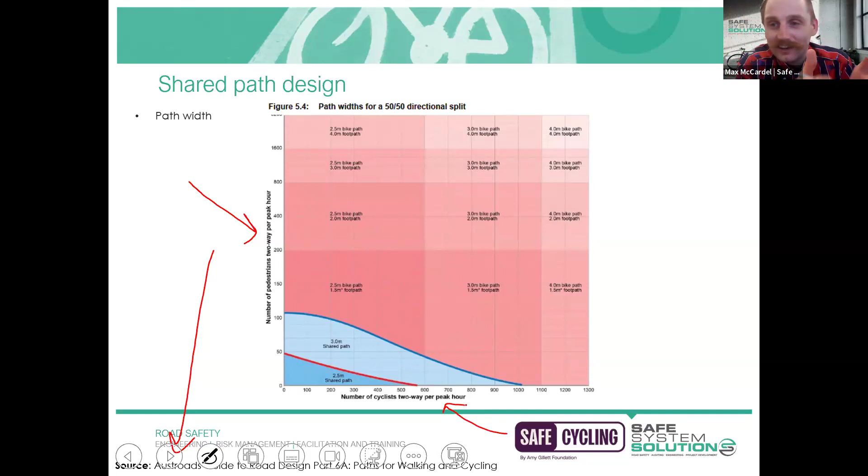This figure from the Austroads Guide: along the y-axis we've got the number of pedestrians two-way per peak hour, and along the x-axis, number of cyclists two-way per peak hour. Basically it's saying how many riders and how many pedestrians you're expecting during the peak time.

I'll focus on the extremities of this graph. If we look in the top right-hand corner, we've got lots of riders and lots of pedestrians. What's being recommended is a 4-meter wide bike path and a 4-meter wide footpath. So I wanted to reiterate that we shouldn't just go straight to building a shared path for off-road facilities, because that may not be the most appropriate thing. Instead, reflect on what volumes are anticipated, and that can help you decide what type of facility could be appropriate.

The 3-meter shared path, which is pretty common, is only really recommended within this field here, but as volumes get higher and higher, particularly pedestrian volumes, that's not being recommended.

A few other points to consider: these, like all figures and guidelines, should be taken as aspirational. That's what we're aiming for. It's absolutely better to have a 3-meter wide shared path than do nothing at all. So don't see this as mandatory, otherwise you can't provide for anything at all. But this is what we should be aspiring towards, because we know that will provide a better level of service for both people walking and people riding.

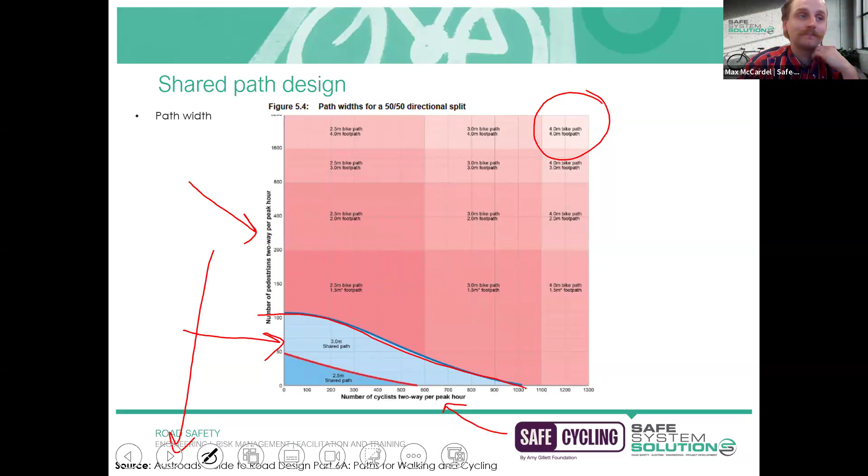The local access path you can think of like a local street. If you reflect on your road use hierarchy, this isn't expected to have an arterial function for shared paths. It's basically connecting to an isolated residential community that probably doesn't have further connections beyond that, and that's when you could look at having narrower paths.

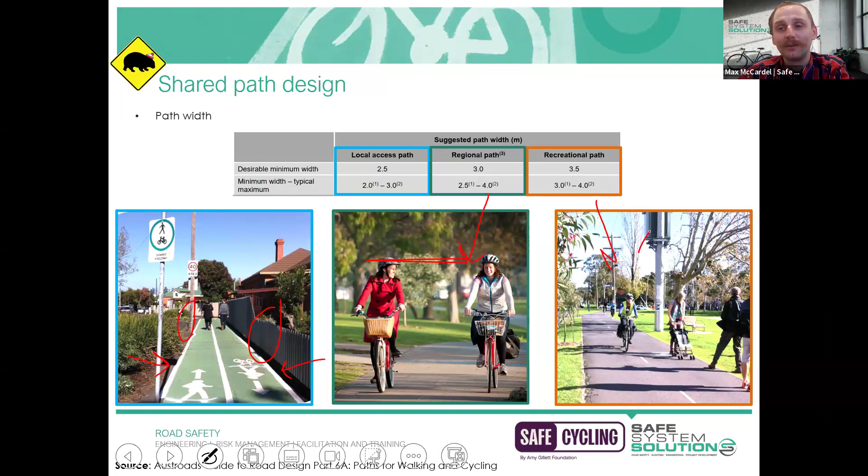Recreational path, I'll be completely honest, the way that the regional and the recreational path is separated within the Austroads Guide is very hazy, very nebulous, the difference between the two. The recreational path may have adjacent facilities where people, parents with prams, may also be joining. So it's not just walkers and cyclists. You may have a playground there, or there could be a school adjacent, and you might have wider facilities because of that, but it's not really well spelled out at all, the clear distinction between those two categories. It's generally just considered a local path or something with a more arterial function.

Marissa: Yeah Max, we've just got a question on that. How do we convince MRPV to budge on these things? They seem to have a blanket statement of 3 meters SUP and that's it, no more and no less, even based on this figure.

Yeah, it's a good point. I mean, MRPV do wonderful work in trying to provide these upgrades to our transport network, and they often have to work within very constrained environments and are often completely aware of the implications of adopting larger footprints or widening out shared paths and what that could mean. So I fully respect those kind of constraints that they work from.

How could we better advocate for those wider facilities? I think what our job is, as people really involved in cycling infrastructure or interested in advocacy, is to use our influence and our knowledge of these guides to say we know that it is a safety issue when there are narrow paths. We know that it does cause riders to weave in and out of pedestrians, which provides a poor level of service for riders and pedestrians. And we can also back that up with what Austroads is actually telling us to do, which is, in this scenario, we should be building a 4-meter wide facility or whatever it is.

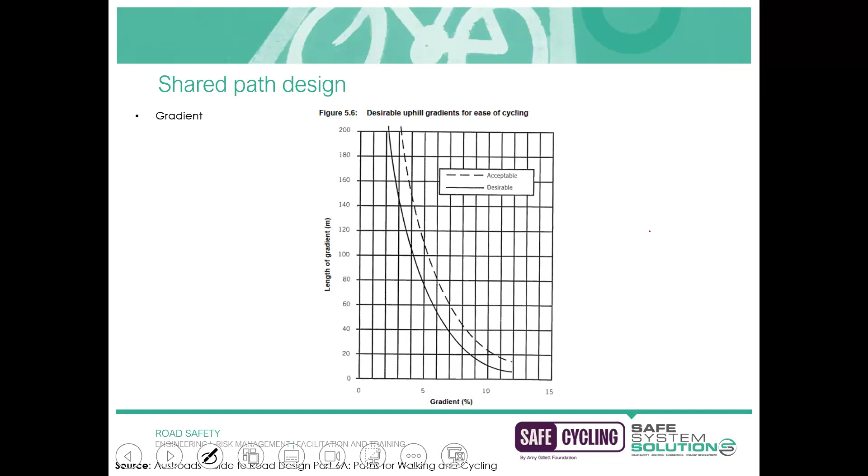No worries. So we've got now another diagram for us to look at, which is considering the gradient or the steepness of a shared path and what would be considered desirable or acceptable. This diagram is easily 20 years old, adopted from a US journal, and there's probably some interest in perhaps revisiting this, particularly as we've seen the fleets of our cycling, our bicycle fleet, change over those years. We are seeing more e-bikes that have no issues at all getting up really, really steep hills.

Just wanted to acknowledge that this has been based on your traditional average bicycle. What we're looking at is along the y-axis, we've got the length of the gradient, and along the x-axis, we've got the gradient as a percentage.

I'll just pick a number as an example. If you've got a 10% gradient, that is very, very steep. You would absolutely know if you are riding or walking up 10%. You would feel that in your calves.

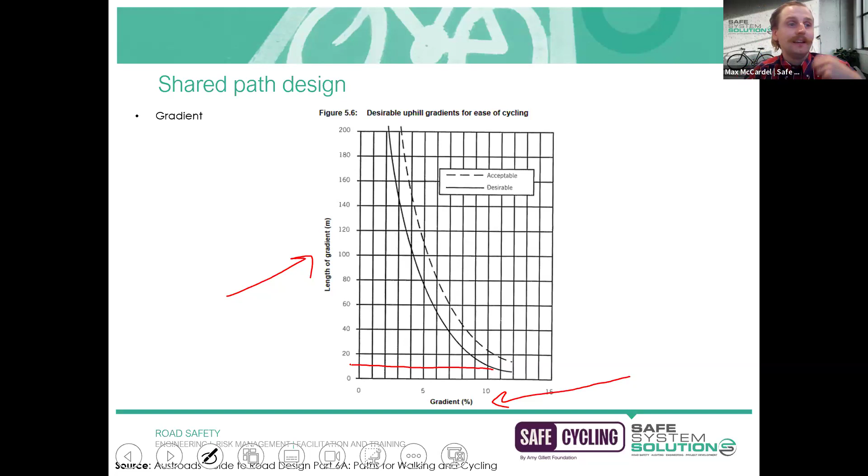Whilst that figure does refer to riding uphill, it's really important that we also consider the opposing direction as well. Riders are going to be presumably traveling downhill at that same location. So what are the types of risks that could be associated with that?

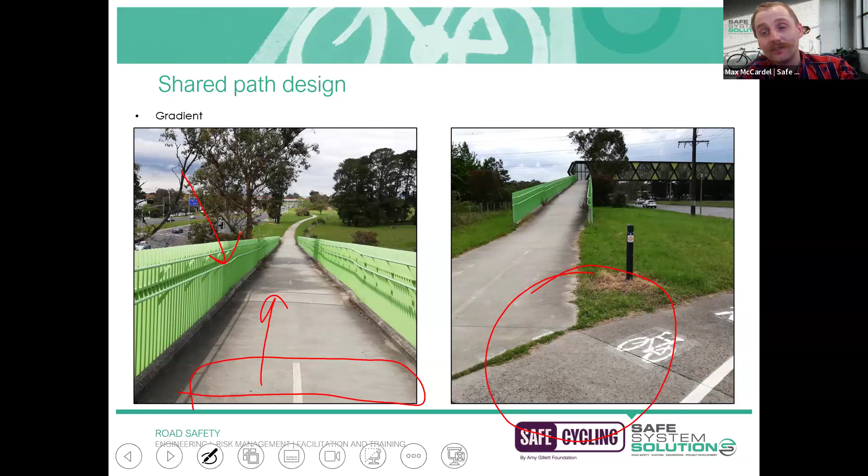Another thing that really exacerbates this as a risk is the beautiful kind of fencing or the parapet that's been installed on the ramp. It provides just like a wall where it's very, very difficult for you to be able to see any other shared path users that could be trying to join onto your path. So not a great design outcome here.

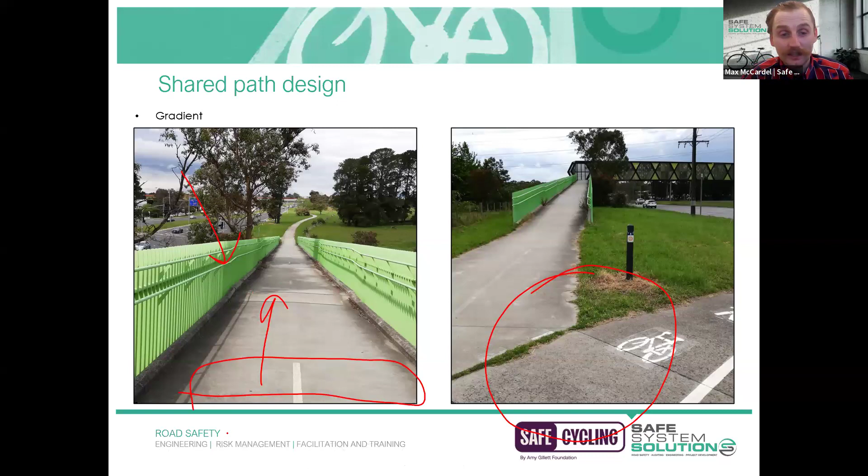This is actually one that we conducted a road safety audit on. So you can conduct road safety audits exclusively for shared paths. We brought this up as a finding - we were concerned about the speed of cyclists and also the significant sightline restrictions where there is that conflict point.

So we recommended let's just try and move the shared path connection further down, make it clear who's got the priority there as well. Just so, if you bring it further down, sight lines are better, and also riders have washed off some of that speed from traveling down that hill section. Very happy to say that that has been installed since this photo was taken, and yeah, we've seen that safety outcome achieved. Good to see lots of people picked up on that.

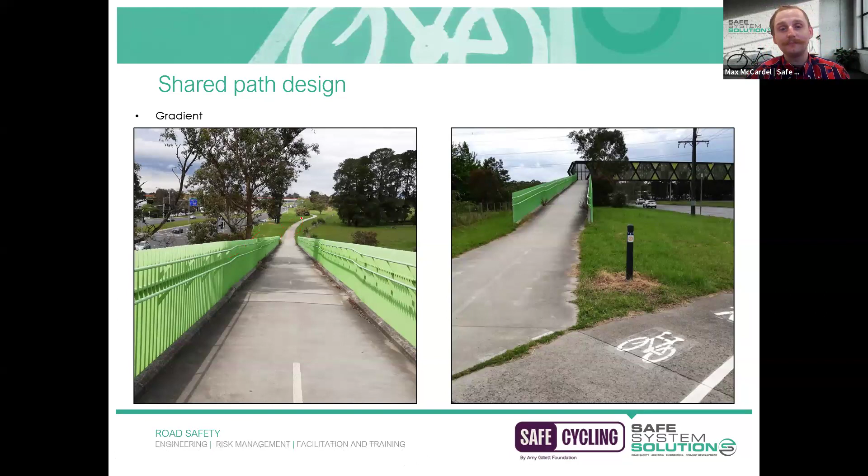First is the operating width of the bicycle and rider. Take it at a constant 1 meter, so it's easy to remember - just a 1 meter wide operating width. That's when riders are on flat terrain.

However, when riders are traveling uphill, they tend to wobble to pick up momentum to climb, and that increases the operating width. So you'd adopt something more like 1.5 meters wide in those scenarios, which could have a run-on effect on how you design the facility.

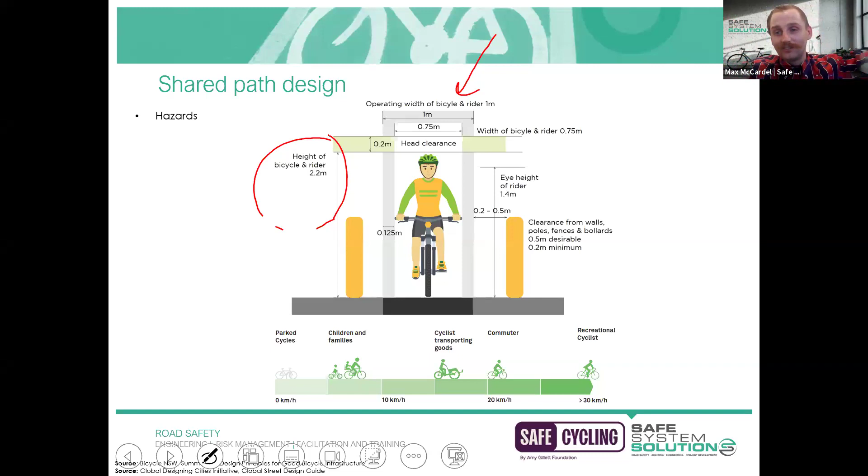The other thing to note is the height of the bicycle and rider is around 2.2 meters, and the head clearance is taken at 200 mil, though it's slightly different depending on where you are. That head clearance becomes important for riders traveling through an underpass or tunnel. It also matters for things like vegetation growing above a shared path - this envelope helps identify when things could get too close to riders and need to be mitigated.

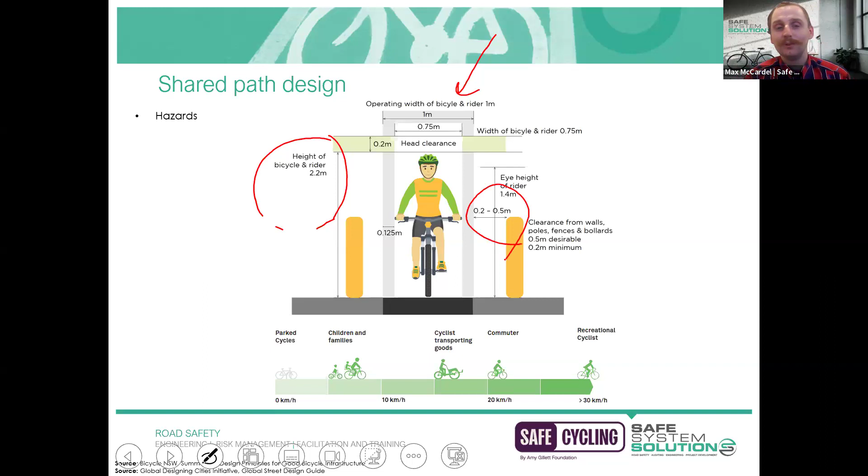The other important dimension to be aware of is the distance from the edge of the operating width to any fixed rigid hazard - a utility pole, fire hydrant, tree, whatever it is. Generally we take half a meter. It's marked as desirable, but I'd say that's industry standard - half a meter from the edge of the operating width to a hazard. Outside that space, it's deemed too far away and not something we need to recognize at this stage, depending on what it is.

The 0.2 meter minimum is really only applicable if it's a flexible object or something designed to be struck by a rider safely. So just remember the half meter desirable - that's the best way to remember it.

I've also included another diagram to give perspective on the speeds riders travel. Generally on shared paths, you could be looking at riders going from 5 kilometers an hour to 25 kilometers per hour. Faster than that, riders tend to use on-road facilities since they don't want to weave in and out of pedestrian traffic. But that range is what you're looking at for riders.

Max, just a couple comments - there's a big difference between the eye height of a rider, 1.4 meters, and the height of a bicycle and rider, 2.2 meters. Can you clarify this difference, please? It's a good question. Eye height is 1.4, height was 2.2. I can't say I've really questioned that too much, but that's about an 800 mil difference, which does seem like a lot. It's probably thinking about a rider in the worst case scenario, standing on their pedals as opposed to sitting down. But even then, 800 mil does sound like quite a significant jump.

I'll open that up to the chat. Yeah, we've got a few comments saying perhaps standing on pedals. Maybe it's just the worst case scenario, like someone actually standing up on their pedals, and that's the clearance adopted there, whereas the eye height is for a rider sitting down. But I still think 800 seems like a lot - I wouldn't have thought standing up would account for that. Good question, I like to be challenged. Yeah, some good and funny comments in there too.

There was another question: in the previous example, why do you think this was not picked up earlier by an RSA during design?

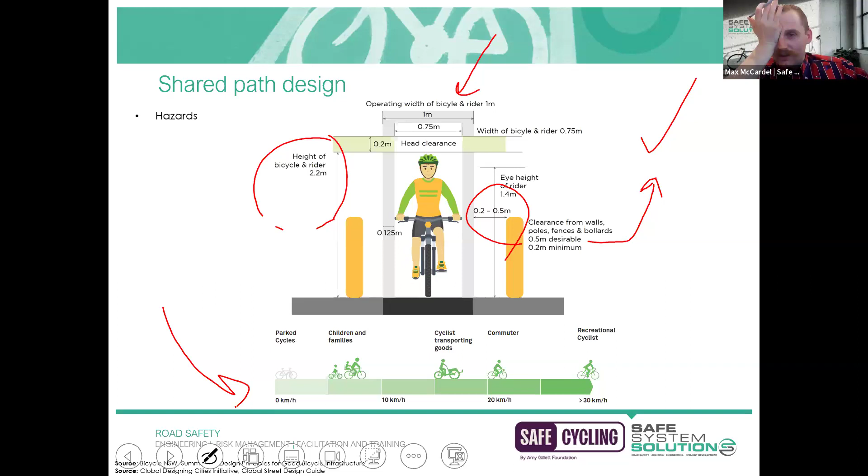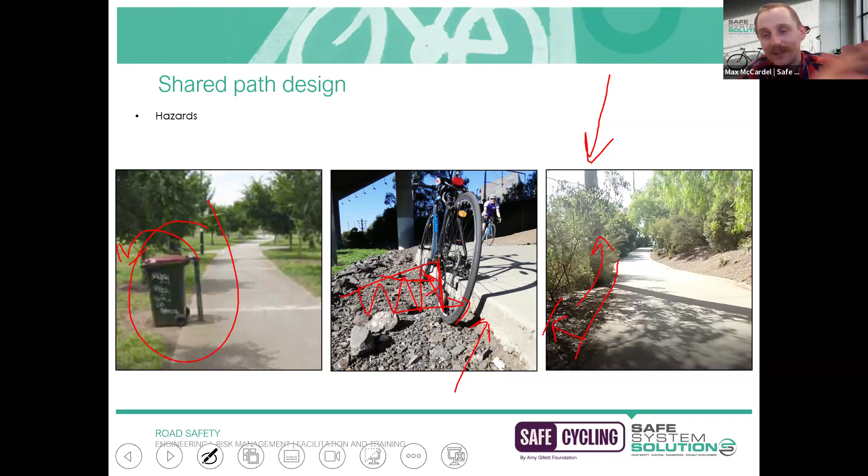If it's within that space, we would consider it a hazard. In practice, you take a 0.5 meter offset from the edge of the shared path - in other words, you accept that the edge of the operating space for the bike rider coincides with the edge of the shared path, which is a pretty reasonable assumption. What that means is if you're a designer and you've got things in aerial view - let me draw this out to help clarify. If you were designing a shared path and it looks like that, you would take this line and apply a 0.5 meter offset, so it looks something like that - basically like a shoulder. You'd be able to quickly identify if there's any trees, signs, or any fixed rigid structures within that space that could be classified as a hazard. Your job as a designer is to try and either shift the shared path away from those things or relocate the hazards. That's kind of how it works in practice.

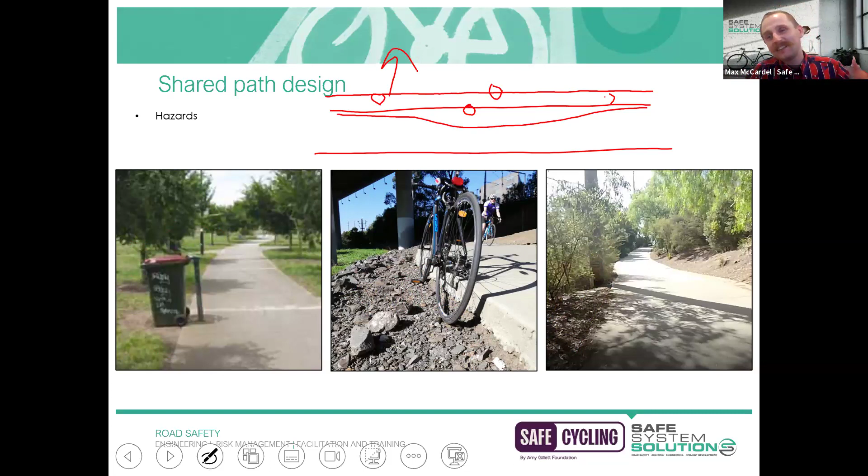Of course, if you don't have that luxury and you're working in the retrofit space and you're just trying to delineate the hazard, this is not removing the hazard, so the risk still exists.

But what we have seen being utilized is flexible paddles on shared paths, as well as line marking showing that the path is narrowing. This is by no means best practice. You don't want to be doing this. This to me is an afterthought. You want to be picking up this during the design, and basically maintain that width of the bicycle, of the shared path facility all the way through.

So if this had been picked up during the design, that shared path could have been kept consistent, and this signpost could have been moved into that embankment and built like a retaining wall structure. It doesn't need to be that big, that's a bit dramatic, but just ensure that you're able to support all of that surrounding embankment.

So that's just a few words on common hazards that we find adjacent to shared paths. Of course, there's numerous others. There's plenty that we could have talked through there.

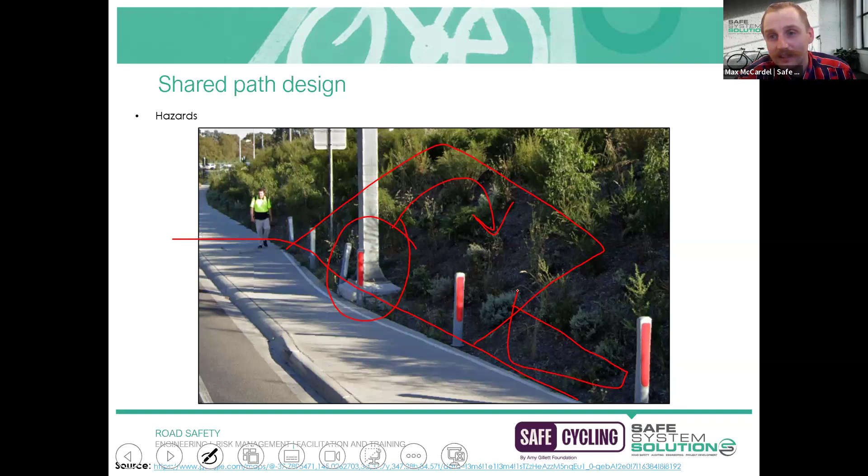Good question, pretty valid. Absolutely, it could be, but I'd like to think that our geotech and structural friends would be able to design something where you could maintain a 0.5 meter offset and perhaps build a retaining wall that isn't right up against the adjacent shared path.

I was going to read out Josh's question that just came in with regards to offsets to paths in constrained locations. Would it be more desirable to reduce the width of the path to maintain a 0.5 meter clearance, or alternatively would it be a preferred treatment to reduce these offset widths to maintain desirable path widths? It's a mouthful. I'll let you answer this one, Marissa.

Well, let me just find out. It's a good question, and I'm afraid it doesn't have a uniform response. The first question I'd be asking is, if you're unable to meet the 0.5 meter offset to any hazards, well what are those hazards? If it's isolated instances of trees, then probably I wouldn't worry about touching the cross section for the shared path. I'd just maintain it and recognize that there's isolated areas of higher risk.

You could also look to protect those isolated areas with cycle-friendly fencing, which we also talk about today. But conversely, if the hazard was consistently 100 mil off the edge of the shared path and presents a significant risk, say a fence with cyclone barbed wire mesh fencing on top, then I would be trying to narrow the shared path, because it's really important that we get riders away from that. So that's just a general assessment, but it kind of depends on what you're looking at.

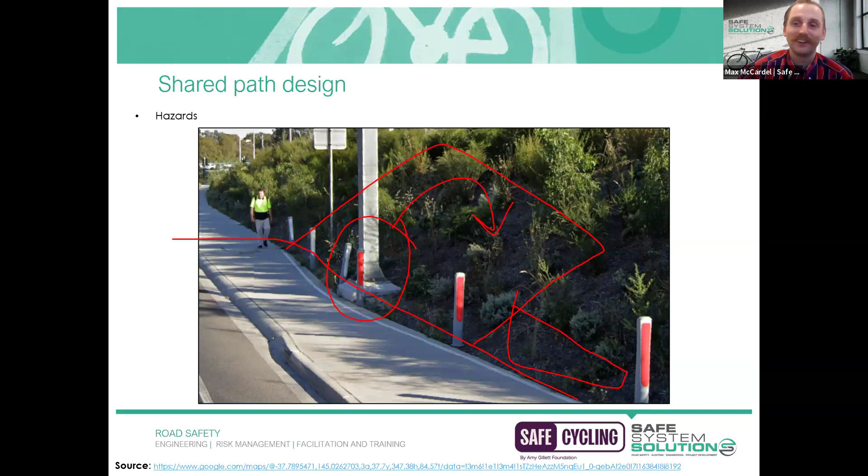I think we're all good in the Q&A at the moment. Thanks, Max, no worries. We just had one pop into the chat: would it be a reasonable approach to proceed using a risk assessment based approach then?

Absolutely, strongly agree with that. Have a bit of a chat around what would be a higher risk: to adopt a narrower cross section, or to maintain the cross section and potentially get closer to the hazards. Have a bit of a workshop around what those situations and scenarios look like, and then develop that risk profile. I think that's a really good suggestion.

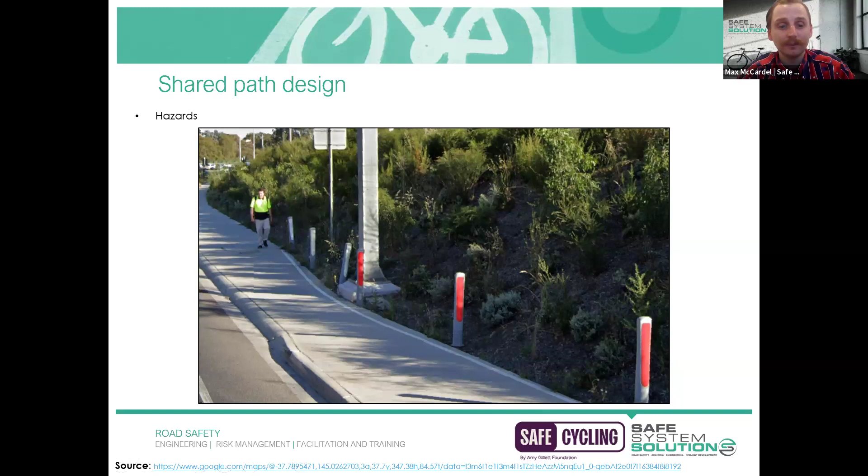Great, thank you, pleasure. So we'll keep chatting through, and next part, just wanted to make a note that we do have sightline requirements for bike riders.

So for those that have worked within traffic engineering, transport planning, any kind of technical design roles, you'd certainly be aware of stopping sight distance calculations, both for horizontal curves and for vertical curves.

So horizontal just means, can you see enough around the bend? If there's a hazard there, you can stop in time. And the vertical is, is there a crest on the hill that you're able to see over? If there's a hazard there, can you stop in time?

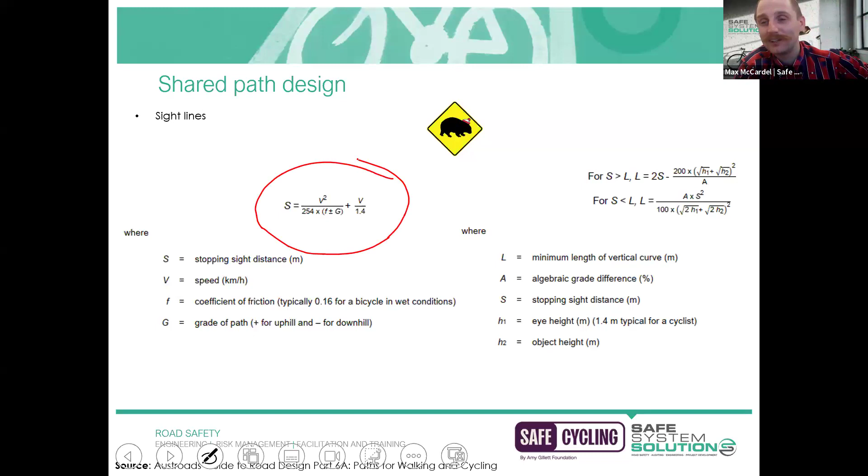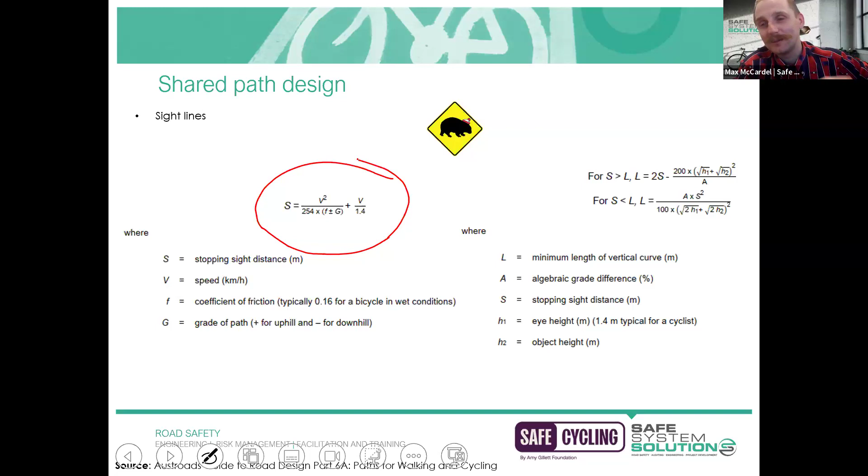Just wanted to make a note that we have calculations just for bike riders, perfectly suited for shared path uses. So if you are in that space, make a note of that calculation. It's very similar to what we do with stopping sight distances for general vehicles, just tailoring this for the speeds and friction resistance of bicycle tires as opposed to vehicle tires. You don't have to do that as part of your quiz or anything. Appreciate not everyone has that skill set, and that's okay.

This is what I was talking about, the sight distances and why you'd be doing these kind of checks. If there is an object situated on the shared path, you want to make sure that bike rider has got enough space to be able to slow down before they strike that object. It could be a hazard like a fallen down tree, or pavement that has failed.

I'm going to let my dog out of the room because he's having a bit of a stretch. Hey.

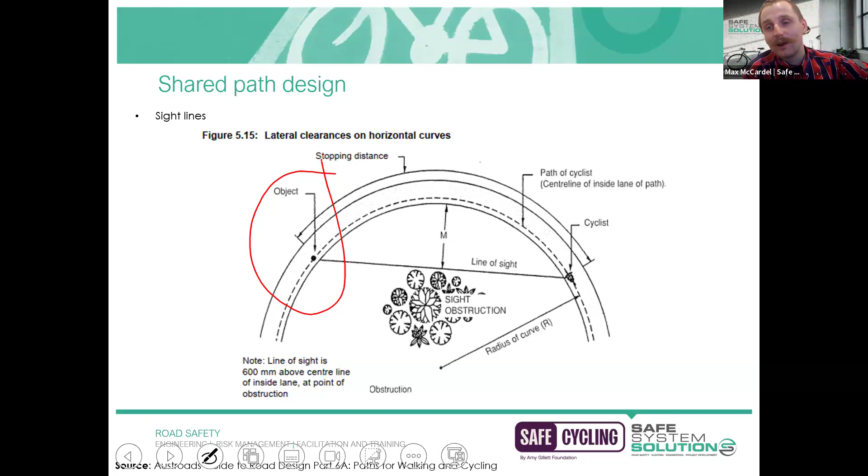Sorry about that. So that's the reason you'd like to make sure that you've done those kind of checks periodically throughout the alignment, just so it's clear whether or not we're able to maintain those distances.

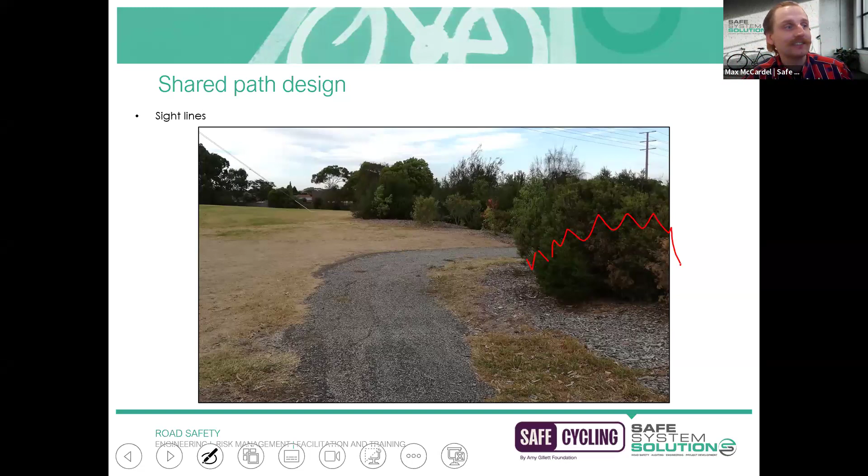All right, we'll move on to fencing now. I alluded to this a little bit before, but basically there might be areas where we are unable to relocate the shared path to move away from the hazards. We may be unable to relocate the hazard itself. So perhaps we're looking at actually installing fencing, similar to a barrier system for vehicles. We've got fencing for cyclists, so that they are shielded from that path hazard.

The two main reasons that we'd put in fencing are because we've either got a significant vertical drop, think of a cliff, or we've got a really steep embankment. Those are the two primary reasons that we put it in, but certainly not uncommon to see fences being put in because there's a building that's really close, and there's concern with riders hitting the side of that building. I've seen that being installed. There's a myriad of different reasons, but I'll just look at what Austroads is telling us.

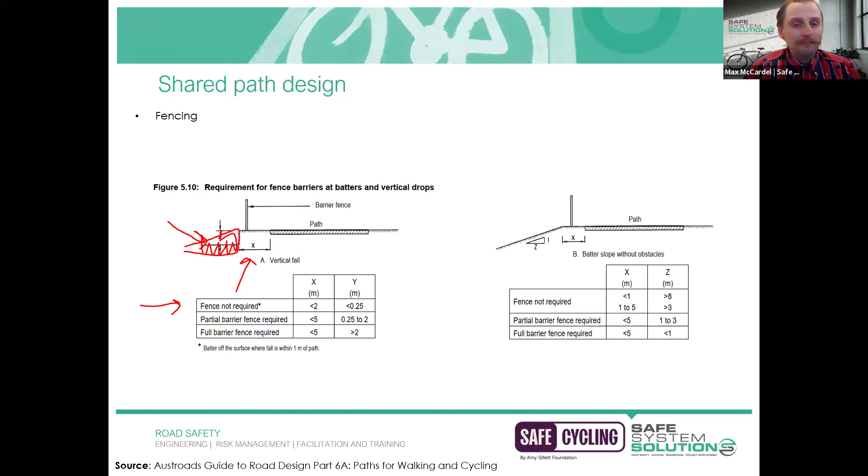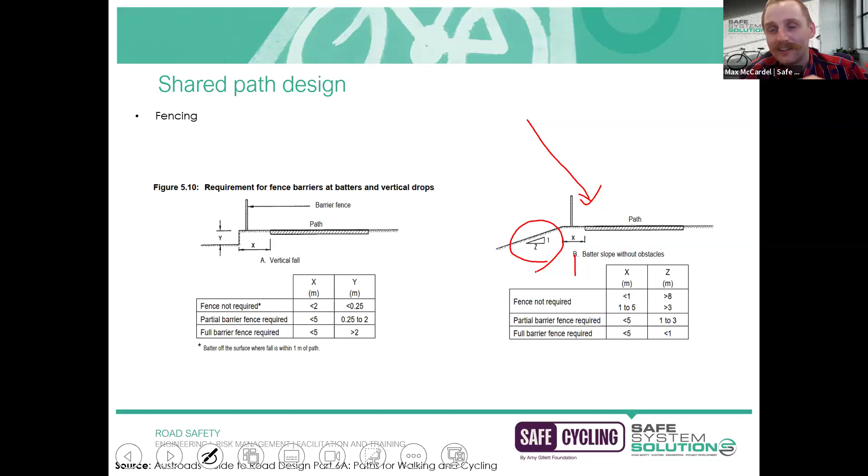We'll look at the right-hand side now. This figure is demonstrating when the adjacent embankment gets steep enough that you'd be putting in a fence. The way it's measured is, once again, X, which is the distance from the edge of the shared path to the hinge point, as it's referred to, or just the top of the embankment. The ratio used is 1 to Z, so 1 high, Z wide. Just a common formula used within slopes - rise over run, if you want to go back to mathematics.

Anyway, a fence isn't required if we've got a very, very flat slope there, depending on how close you get to that hinge point. But the closer, or the steeper that you get, or the lower that Z value is, the more likely you're going to require either a partial barrier or a full barrier fence.

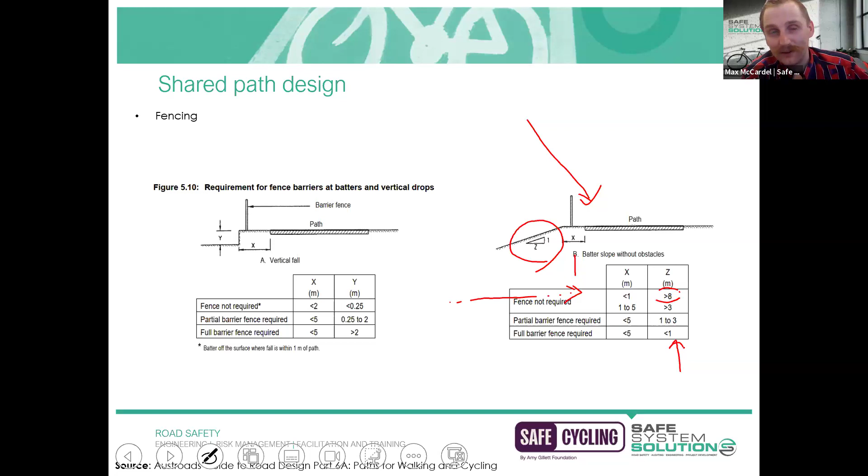I genuinely think that this is overly complicated, and I'm not really sure why this categorization was set up this way. If anyone does know, I'd be more than happy to have a chat around this. To me, I tend to go for the full barrier fences because I think we should be protecting everyone, not just the bigger adults, but also considering others that can fall through there. So anyway, that's just my two cents.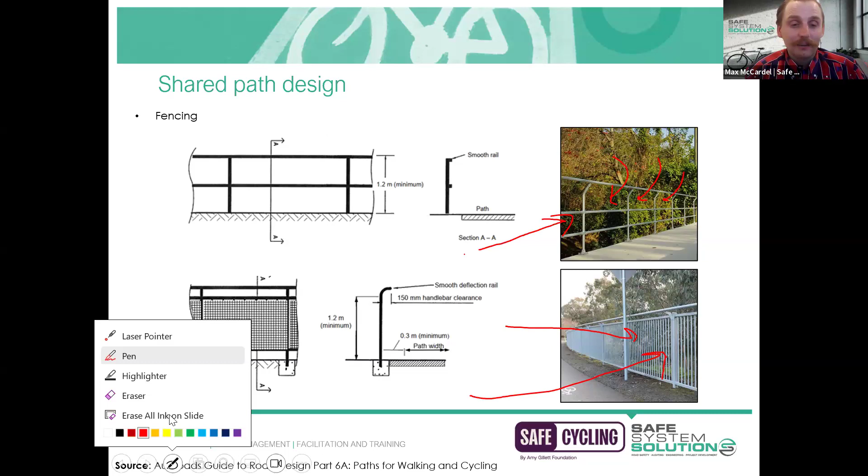The other really important feature we'd like to see on all of our fencing is this idea of a smooth rail, or a smooth deflection rail - the feature we commonly refer to as cycle-friendly fencing. It's actually designed so that if you're riding your bike and you collide with this fence, the first thing you're going to hit is this smooth deflection rail, because it juts out, it protrudes from the fence. The other benefit is it's deliberately designed so the first part of the envelope that hits this is your arm - it's at the height between your shoulder and your wrist. So your handlebar isn't going to collide with it, there's no snagging risk. Those design solutions make it much more likely for an errant rider to actually stay on their bike and reduce that risk of destabilization. So big fan, cycle-friendly fencing.

There's numerous manufacturers out there that have their own bespoke products. I have no product stance - you just work with whatever works in your jurisdiction. But just make sure that you've got a smooth rail, nothing for handlebars to get snagged on, and that it's set at an appropriate height.

Okay, great, just reading through some of the comments. Could there be a combination between visibility through the fence for sight distance versus risk of fall?

Absolutely, that is a very genuine risk. The fencing can act like a wall and create sightline obstructions. This is a perfect example of where you may employ a risk assessment framework to weigh up the pros and cons of having the fence versus the sightline impacts, and work out the best scenario. I'm still yet to work on a design where every single criteria is perfect, and you do need to make these professional judgment calls.

Austroads talks about a 1.4 meter high fence for a big drop. Will that be too high for the shoulder? The picture shows the eye height is about 1.54 meters, so should we use 1.4 meters?

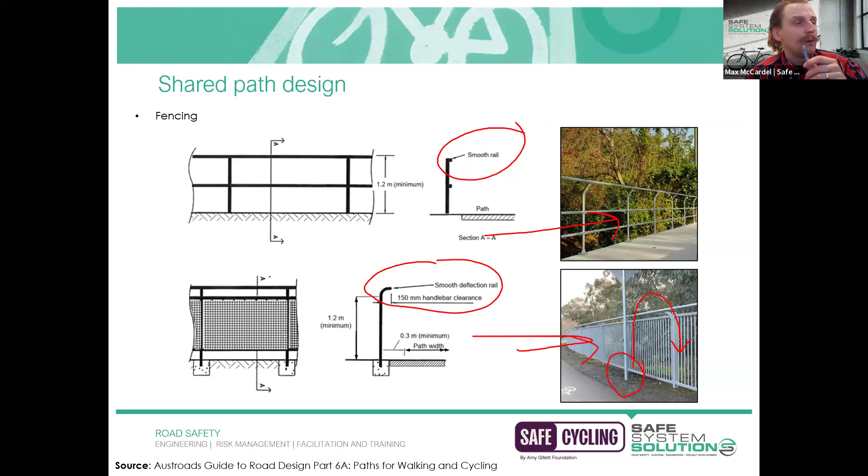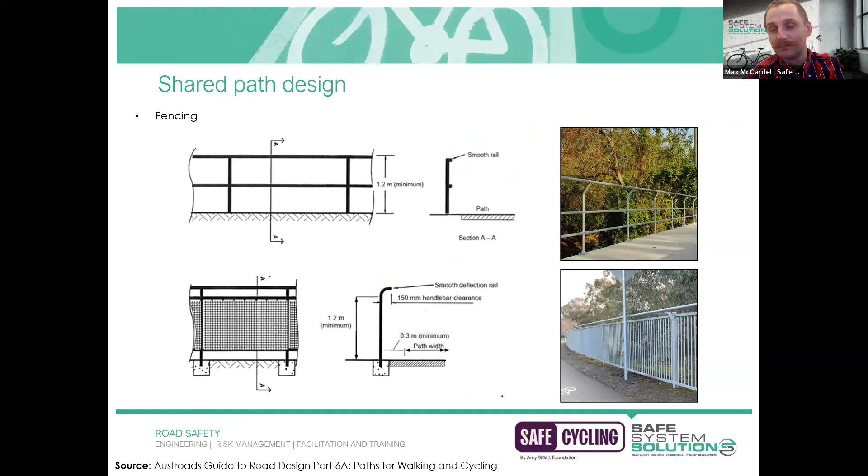I would be recommending what it's stating within the Austroads figure. I haven't got that document in front of me, but if it's saying to provide that level of containment in those scenarios, then I'd be going for that. In these examples the deflection rail is about 1.2, but it can be higher.

This figure says we don't want bars curved or protruding towards the rider, but the previous slide says you want a deflection rail with 150 millimeter handlebar space. So we don't want vertical members that are protruding. If that protruding horizontal deflection wasn't there and that post was protruding out, you could see how quickly that could become a snagging risk. Similarly, these little brackets, if not protected by the deflection rail, would become the protruding member that we want to avoid.

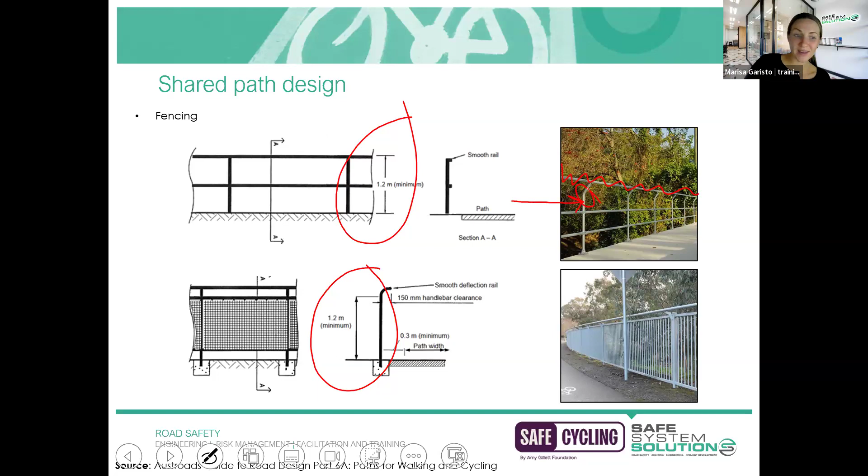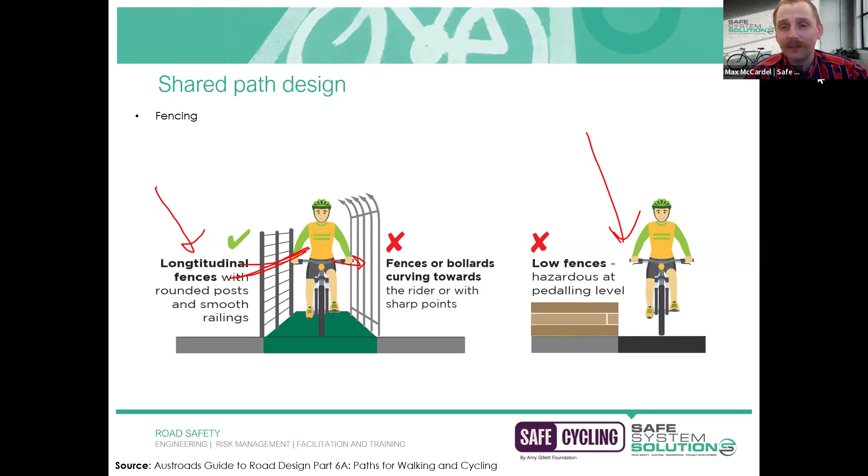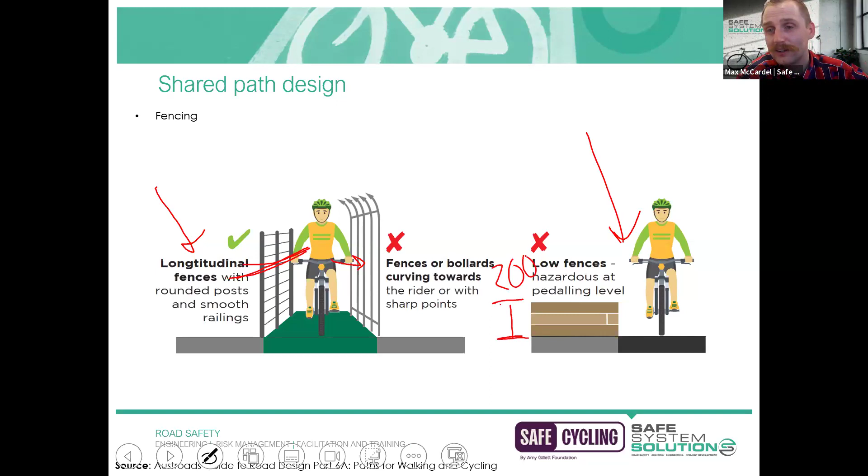Thank you, Max. No worries, this slide also might cover off on some of that detail. Longitudinal fences with rounded posts, smooth railings, don't want sharp, blunt edges. Fences or bollards curving towards the rider, anything with sharp points is not something we're too fond of, as that's where you can get the handlebar stuck into those spaces. A deflection rail helps reduce that risk. Also important to note that things at low level can be a hazard for pedal strike - generally around the 200 mil mark could cause a rider to strike their pedal and have a destabilizing effect.

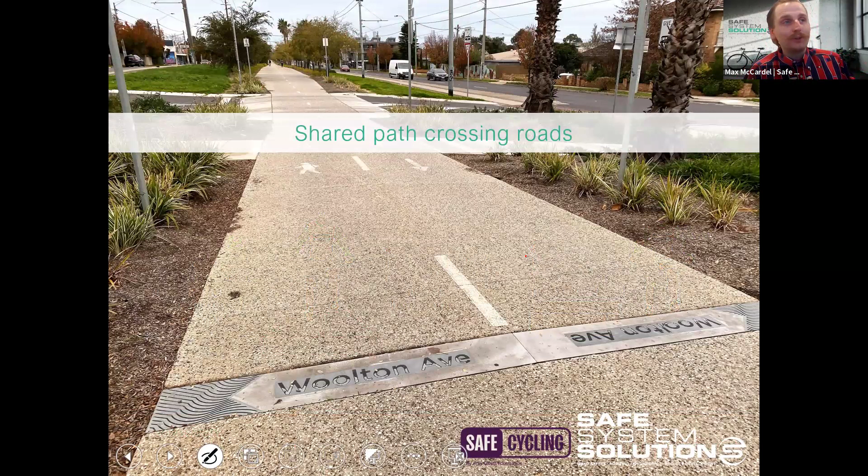Shared paths crossing over roads - I'm going to move on to our next topic for the day. I'll move the banner down so we can have a better look. Marissa, if you don't mind launching a poll, just to close off the discussion on fencing, I want to hear your thoughts on whether we should be installing fencing along this shared path.

I'll draw a little diagram of what I'm talking about - a fence in this type of location with the smooth deflection rail protruding out and things like that. Would you be recommending that? Do you think it should be installed to improve safety? I'll give you 15 seconds to give that a go.

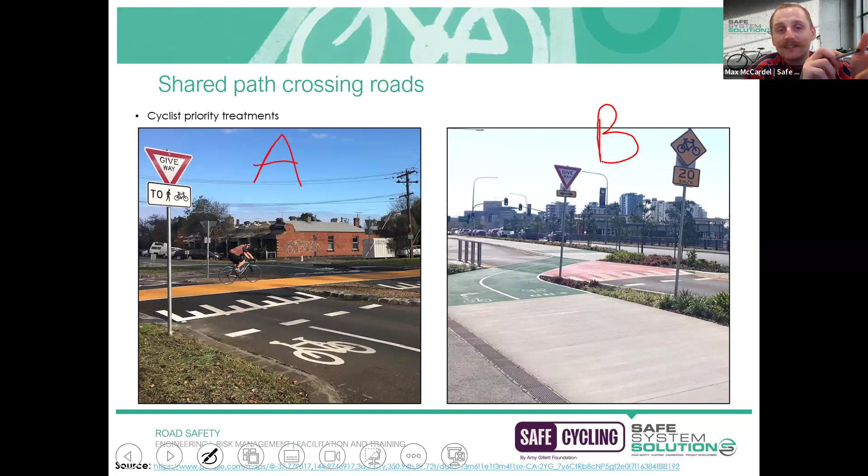I've got these two separate examples now. The one on the left I'll just refer to as example A - that's from Victoria. The one on the right, that's up in Brisbane, I'll say that's option B. Perhaps you can understand why I started this session off just saying that the signage and the pavement marking looks different no matter where you are - this is a good example of that. But they're both doing the same thing: both of these examples are a shared path crossing over a carriageway, and both of them have been raised.

My question that I'd like you to answer in the chat is: my preferred treatment is A. I want you to pop in the chat any thoughts or ideas of why you think I would say that - what is it about option B that is not as attractive or not as safe? I'll give you 25 seconds to give that one a crack.

All right, good responses coming in. I did say a question would come in.

That give way sign is actually facing general traffic, so that give way applies to the traffic lane. So motorists are forced to give way to path users there.

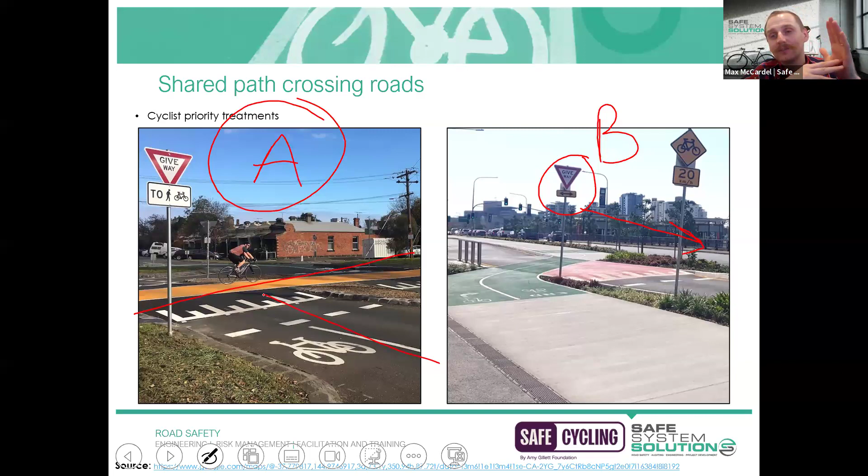In option A, the conflict point is more or less perpendicular, and when we have 90-degree angles, we generally have much better sight lines. You can see even the face-on rider finds it pretty easy to turn their head to check if there are any vehicles yielding or stopping there, and make that eye contact.

Now, of course, priority is awarded to that rider. However, it would be naive for them to assume all traffic will just give way. Instead, it's much more reasonable to make that eye contact and ensure that relationship and priority is understood.

If we compare that to option B here in Brisbane, if you're riding down here, you basically get to this point and need to turn your neck close to 180 degrees to see if there are any vehicles at the hold line. Super uncomfortable to do, particularly while also trying to navigate a turn, with a lot to process. So from the rider's perspective, it's just an uncomfortable experience.

Also from the driver's perspective, you may be giving way here, looking at the give way sign and really just focusing on riders coming towards you, not necessarily thinking about riders in the same direction as you. So there's that detriment as well.

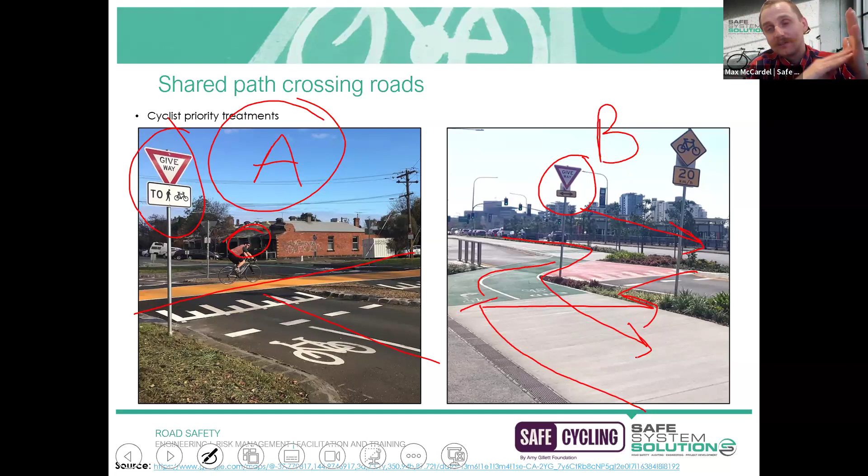This is what it looks like on the ground, and you can actually see there has been lots of braking from riders, inferring perhaps there have been lots of emergency maneuvers because the driver has failed to yield and there hasn't been clear priority assigned there.

All right, we'll move on to bollards and have a good chat through these devices. So for shared paths crossing roads, we love to see the use of the raised conflict point, but it's certainly not uncommon to see the use of bollards, which are a fairly unattractive and not very amenable way to go about things.

Bollards historically were used to let riders know they're approaching a road, and perhaps even to slow down cycling traffic. That's no longer recommended for that purpose. Instead, they're still used to deter vehicle entry.

A really good conversation to have with your stakeholders is how likely it is to actually get vehicles entering this space. Are we talking about a 1 in 10 year possible outcome, or a 1 in 100? How probable is this event to actually occur?

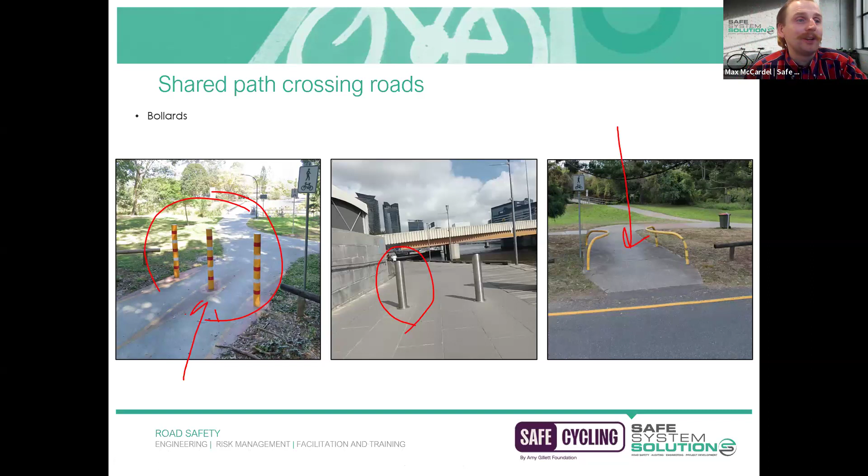The one on the right here, the banana bars, are no longer installed. They used to be installed in Gold Coast and Brisbane, but they're no longer installed because they've got this really awkward pinch point. So if you're trying to enter and exit at the same time, it gets a bit dicey.

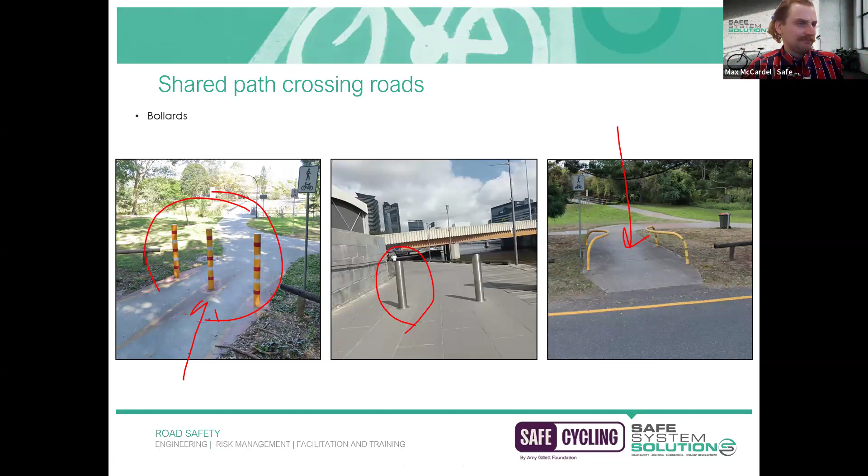But I'm not really convinced that's the right way to go about that warning, because although you look at it in this scenario and it's incredibly obvious, and you think, why is this an issue? It's so easy to see that.

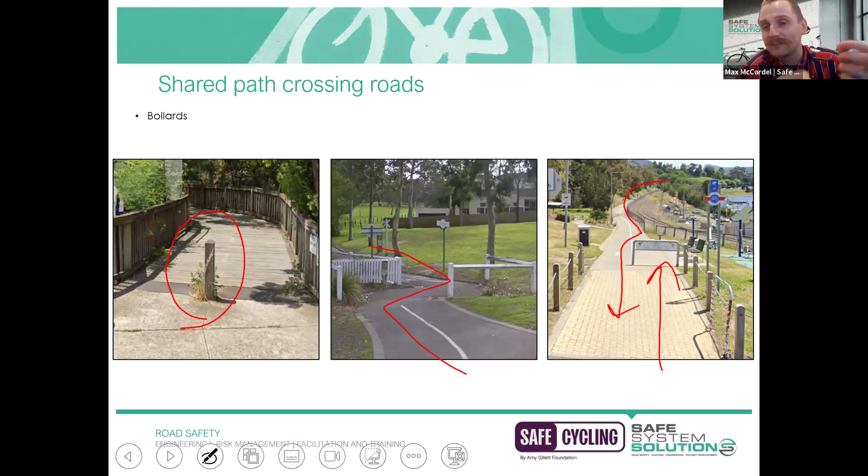An example of that is this fellow here, his name is Andrew. A few years ago, he rode into this bollard we see there on the left. It happens to just be around the corner from our office. He reached out to council, and a few days later they decided to get the spray cans out, and gave it a bit of a facelift and upgraded the reflecting tape on there.

But what happened when he collided with it was he broke his wrist and had some facial injuries as well.

Whilst he was on the ground, he gave the ambos a call, and while waiting for the ambulance to arrive, he witnessed 3 other collisions with the exact same bollard. So within that space of 40 minutes or so, there were 4 collisions with the same bollard.

There's a few reasons I bring this up. Number one, just to make a comment that cycling injuries are incredibly underreported. Lots of cyclists don't know who or if they're allowed to talk to anyone, and we don't necessarily have the data of all the collisions that have occurred on our network. But we do know that collisions with bollards are very, very common.

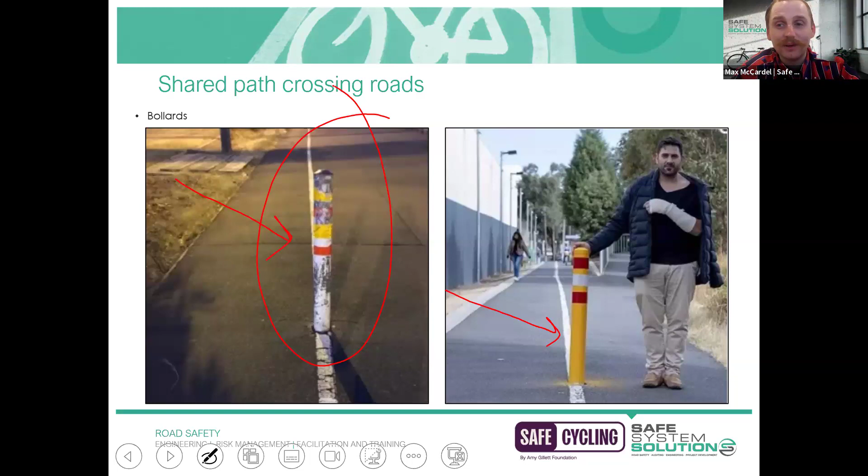An example from the Austroads guide of what can be completed instead of bollards is a very similar idea to how we would treat minor legs approaching a main thoroughfare on a road network. Basically, install a splitter island. If you put a splitter island in the middle of the shared path, you can use kerb and channel, landscaping, or even a bollard within that space if you're able to maintain those clearances on either side of it.

It's very obvious as you're coming up to this point that you will see, okay, something in the shared path is changing. I know I'm approaching a road. Something's definitely changing about this environment.

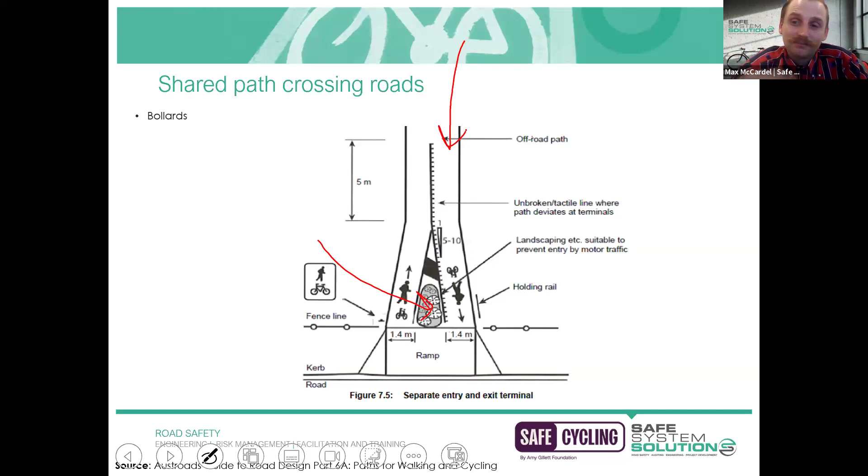But the fact that there is some kind of infrastructure in the middle there, and you've only got a 1.4 meter path there, a 1.4 meter path there, you've greatly reduced the risk of errant vehicles deliberately accessing that space. So this is kind of what we take as a better practice to mitigate that as a risk. Certainly don't believe in just whacking in a bollard and thinking the job's done.

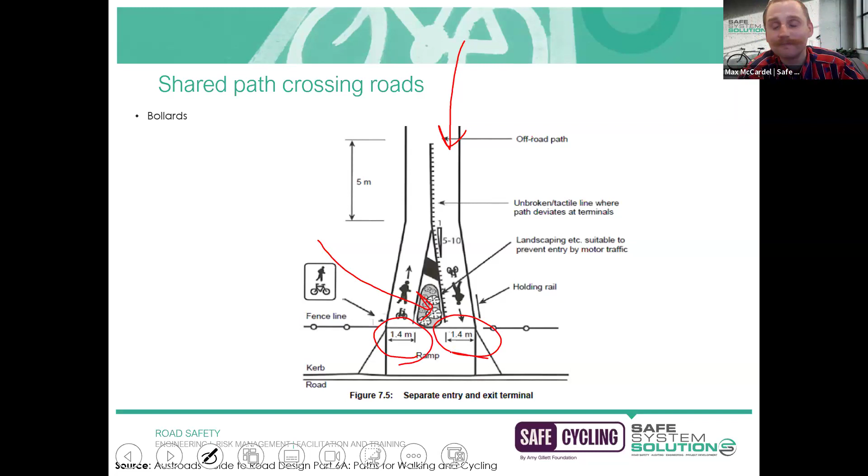One example of where we've seen this kind of philosophy applied is in the attached photo. You can see that they've created this little splitter island. They've used grass in the middle there. They've also been able to maintain the half-meter offset, so they have plonked in some bollards. Just a note on these bollards in particular, they've got little solar panels on the top of them, and so they charge themselves up during the day, and then at night they illuminate, so it's very easy to see them as a hazard during those low light conditions. It's a pretty jazzy little product. Just wanted to show you that it's actually been installed in practice.

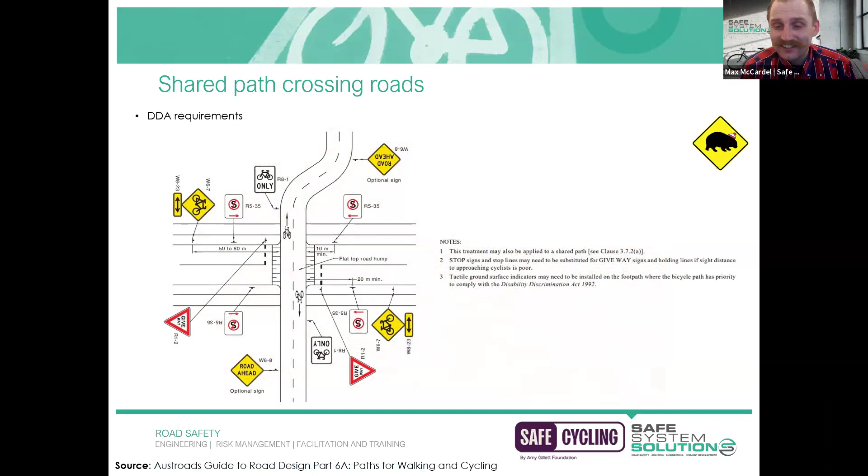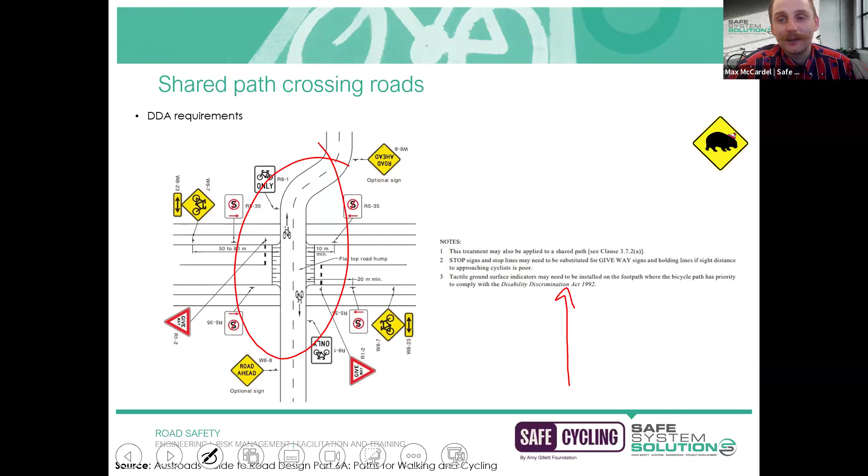I spoke about this briefly before, our DDA requirements are absolutely still relevant with all aspects of the shared path. One thing that often comes up is whether or not we need to install the tactile ground surface indicators, TGSIs. Yes, you generally have to do them even when you're crossing the road at a raised conflict point. Even if you've got the priority for vulnerable road users there, it's really important that people with vision impairments, or who are blind, or have those disabilities, are able to recognize they're about to cross the road. Okay, so none of that changes. Still really, really important that we've got that information for those people.

All right, shared paths crossing over other shared paths. I'll do a quick little final exercise for the day, which is just a question for you all. Pop your answers in the chat. We've got a very confused looking cyclist there, and the question I've got is, what do you think is wrong with this photo? So I'll get rid of her so you can have a better look.

DDA is Disability Discrimination Act. Yes, I just saw that quickly come through the chat.

Right, Marissa, we've had a question from earlier on. Keen to know your thoughts on the use of yellow surface treatment on signalised crossings, pedestrian and cyclists. Do you think there's a risk of users having a false sense of priority at times, even when the lights are red, given how yellow surfaces are used for priority crossings, and where do they have priority?

I actually agree, I think that could be misconstrued by path users. I see the yellow, I get the priority. That's just how it works in Victoria, it's not in other jurisdictions. I don't necessarily think that should be combined in a signal environment. Unless there's actual research to suggest otherwise, I do think there is a risk there of having that ambiguity or being misinterpreted as always having priority. Good question, thanks.

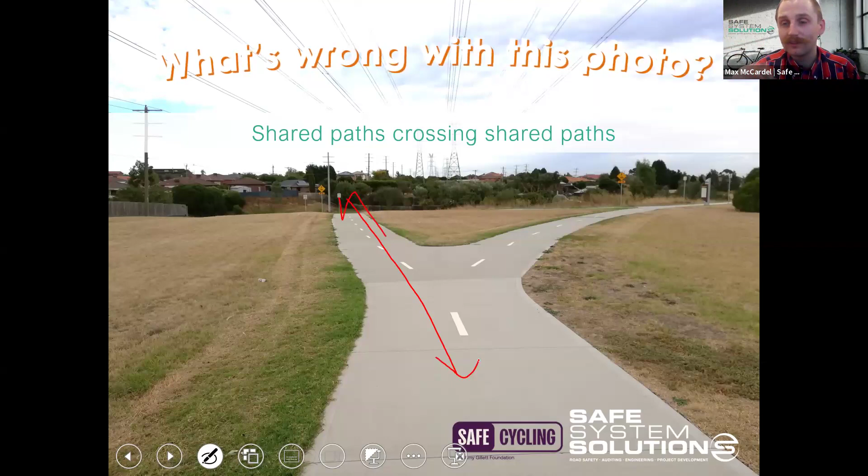But the other really good point there is just the confusion around the priority. So just to draw that one out in case that's not 100% familiar to you, if you haven't heard that term, basically you want to assign one leg as the main thoroughfare, or this is the predominant journey, and then the other leg would get the treatment. So what I would do if I was redesigning this, I would first actually square up this type of intersection. So let's see if I can do this, see what my drawing skills are like today.

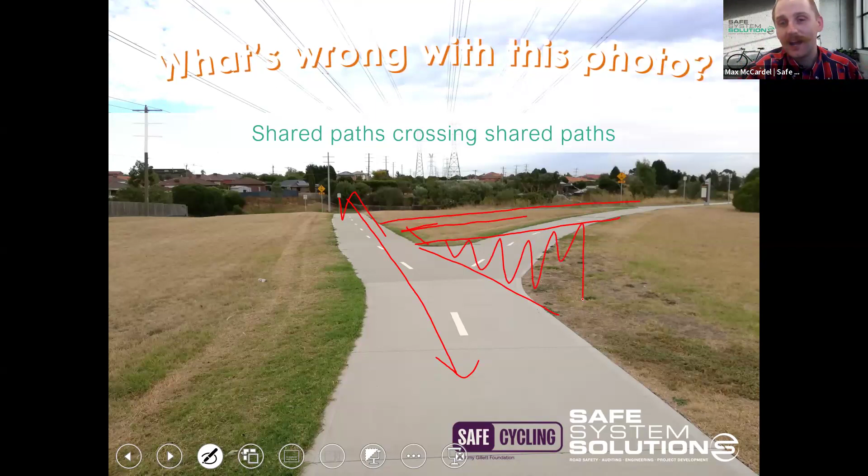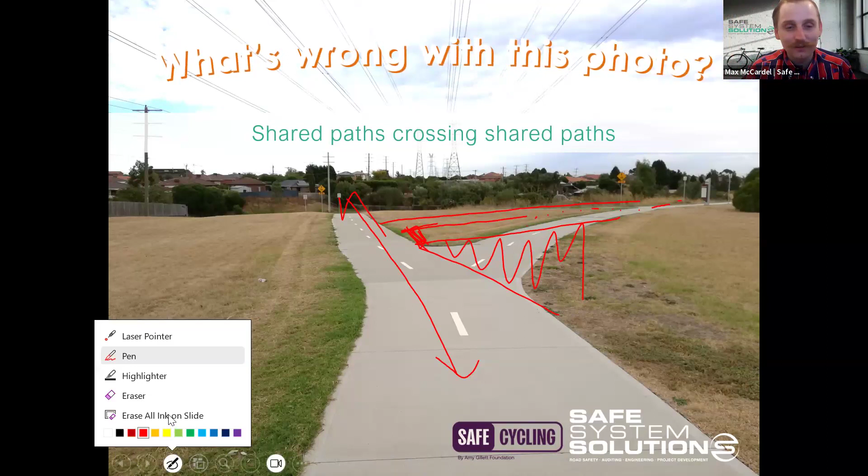So all of that would just be grass now. And you'd have riders as they're coming along this direction on the minor leg, there'd be a stop or give way line marking, as well as a sign. So it's crystal clear: you're on the minor leg, you give way to the thoroughfare. Don't create the ambiguity, don't make it a free-for-all, because that's what will happen. Riders will just assume they're good to go and keep going because they just want to maintain speed. So make it crystal clear.

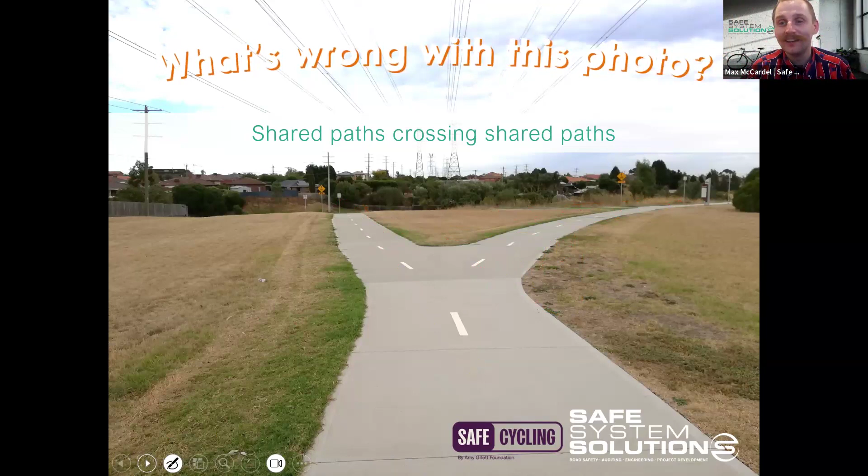Don't make it ambiguous. With regards to wayfinding, Austroads does have a bicycle wayfinding report produced a few years ago now, basically acknowledging that across Australia and New Zealand, we do not do things consistently, and we should be improving on our practices within that space.

None of this is rocket science. None of this is going to really test your understanding or the limits of engineering or sign design or anything like this. You just want consistent messaging, consistent colors, clear destinations for where the bicycle route is going, and providing that clear treatment.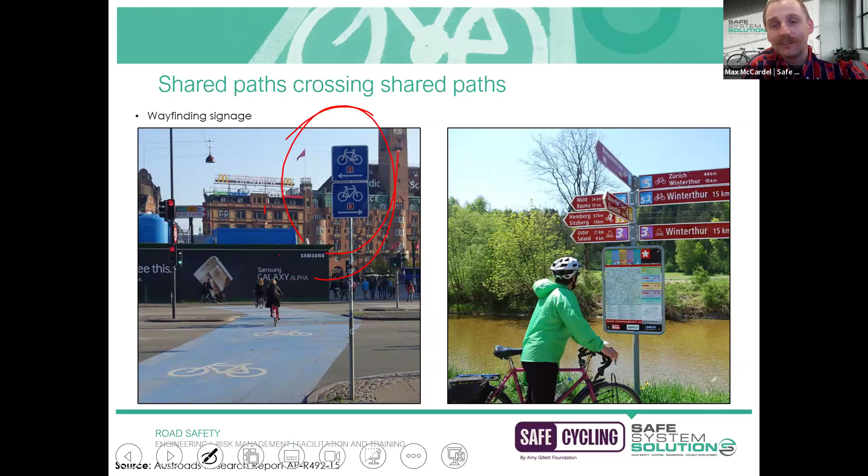Other countries do it much better than us, and it's actually really, really common to use numbering for a route. So the left-hand photo is from Copenhagen in Denmark, and route number 2 is going to take you from the local football ground to the market square in the city centre. If you're on route number 2, you don't need to worry about speaking a word of the language because you know where you're going to get to. Really, really good idea. Similar idea on the right-hand side there in Switzerland.

The final discussion point for today is managing cyclist speeds at conflict points. I've got this example here just on the outskirts of Perth, City West Station. Along here is kind of the pedestrian boom gate area - I don't know the technical term for that - those areas where the gates close on pedestrians when the train's coming, and then they open up and you get this huge amount of pedestrian activity occurring. All those pedestrians, once it opens, walk up and travel along this path and then go to the platforms to get the train.

This happens to run right in front of where the shared path is. So what the designers have opted to go for is to make sure it feels a little bit different. We've got some curb being installed here, a little splitter island, some give way markings. All of these are supplementary treatments just to communicate to riders that they're approaching a space that is not just another part of the shared path network, but something very different. So just trying to make those changes to help with that messaging.

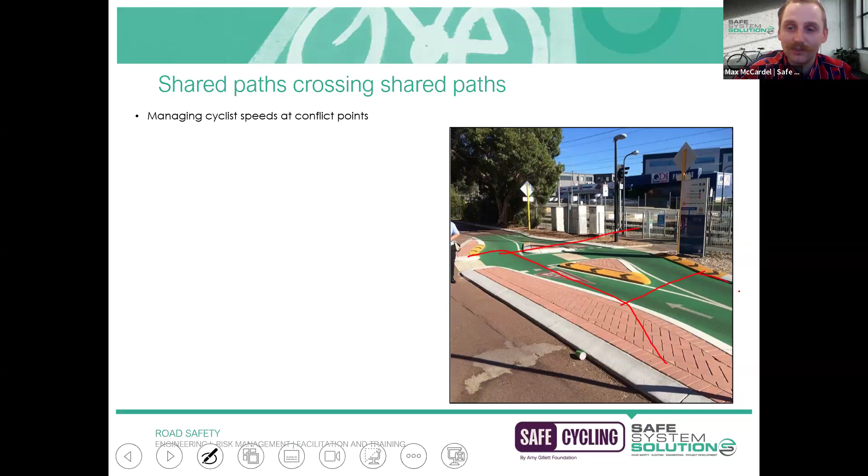I think another way this could have been managed is, as we spoke about with vehicles approaching conflict points, we love to raise them. You can also raise them for pedestrians. So if there was a crossing like this for pedestrians... it wouldn't look exactly like this, it's not the best drawing, but if there was a raised feature, that would physically slow down riders. You're no longer relying on riders to pick up on visual cues - you're physically slowing them down by installing a ramp.

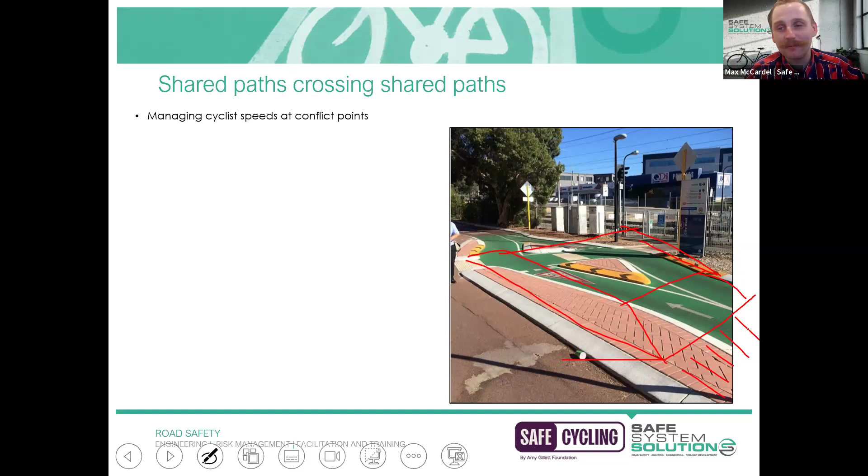Now, the ramp that I've got there would look like something you'd put in a skate park. It's not meant to be so dramatic, it's not meant to actually attract BMX riders. It's meant to just wipe off some of the speed for bike riders, so as they're coming to a highly pedestrianized zone, they can be more aware of that surrounding land use, and hopefully dissipate some of that energy.

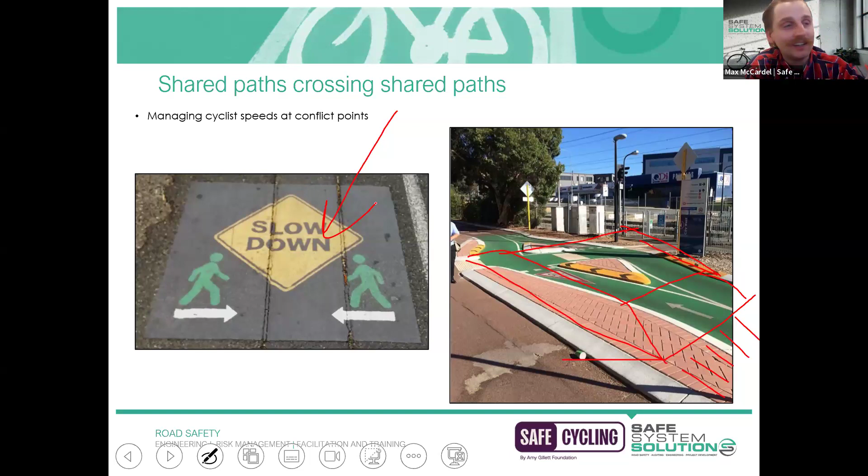In saying that, other things we've seen installed are pavement markings. I don't think they offer any significant benefit - it's actually pretty unlikely a rider would be able to read that and then change their behavior before they get to that conflict point, just because of, you know, they're riding along. But we've certainly seen those types of things being installed as well.

When we are doing our shared paths, we should be thinking about whether we're providing a strategic connection between points of interest, points where riders want to access and spend time, or provide additional transport opportunities like catching the bus or train. It needs to make sense. We can't just put up a shared path end sign and assume demand for riding in that area ceases to exist, because that's not how the real world works. We need to be cognizant of that in all our projects to meet the needs of that community.

Marissa, did you want to go through the LMS, or did you want me to flick through it? Yeah, I can go through it. No problem, just let me get it up on my screen and I'll share that.